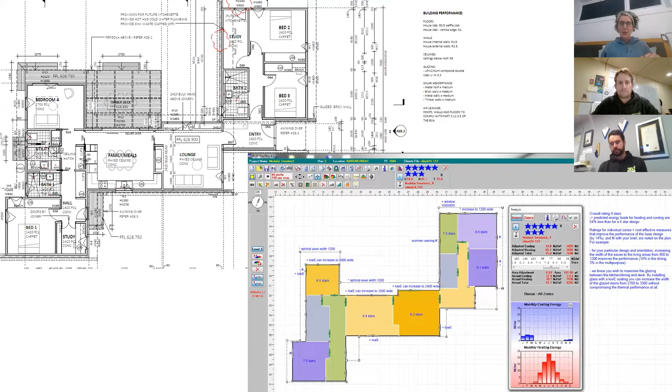And tonight we're talking about a new build, and there'll be fantastic presentations about renovations. I also want to stress that it is a really useful tool for retrofits as well. And I did a webinar for Renew last year about that you can find on their YouTube channel, and some other case studies about renovations.

But Rainbow House, here she is. It's a house that was completed at the end of the year before last. Its rating is just over 8 stars. And the house is only 172 square metres. And I think this is worth pointing out to people. The average new home in Canberra is 253 square metres. So this family home is considerably smaller, but it feels and functions like a fantastic home. And of course, if you're serious about sustainability, making your house smaller is one of the key things you can do. Built by 360. And I do want to point out the beautiful photos you see tonight are taken by Ben Wrigley.

Before we show you the beautiful new house, let me show you what was on the site before. Whenever clients come to us, we do like to investigate the renovation potential of the home. And actually 3/4 of our work is actually renovation work and retrofit work. But in this case, the clients had lived there for 13 years and they were really sure they wanted to rebuild. And after looking at the plans and the house with them, I agreed it was a sensible decision.

The existing house is the classic, north is pretty much straight up. Classic arrangement of kitchen, dining, laundry and bathroom along that lovely northern face. Big living room to the south that opened up to an outdoor area. You can see in the photo here, out here. Did have a little deck at the back, but that's the laundry and the bathroom.

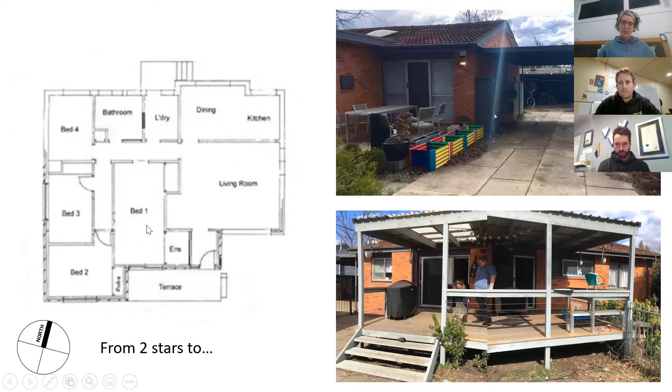They came to us with a fantastic brief, and a talented member of my team, Duncan Hall, came up with this concept - this is the original concept sketch. You can see that the living areas make the most of that lovely northern aspect. We've got two working-from-home spaces, which have come in handy - a study nook here and a craft space here. The bedrooms have been tucked down the western side because the position of the car accommodation was already decided by the existing driveway. And there's this clever little courtyard out front, which hides the clothesline and things, so that none of that stuff is out in the beautiful sunny backyard.

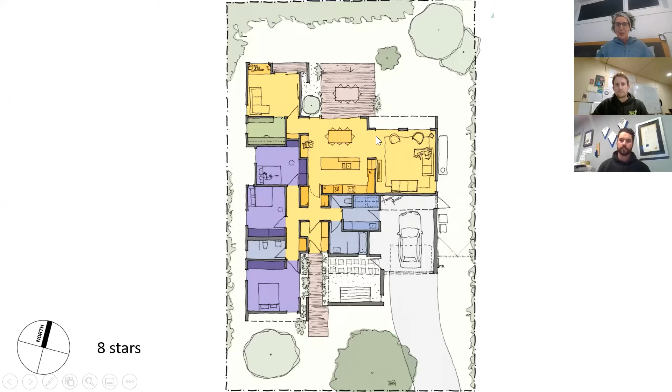As I mentioned earlier, we do the BERS or NatHERS modelling at every stage. At the concept design stage, we'd done some modelling and had it sitting around 7.8 to 7.9, depending on a few things. This is the modelling I did at the second stage, which we call design development. I won't go through it in huge detail, other than to point out that we get the overall house rating here, and you can see the visually represented cooling and heating loads in Canberra. Our houses typically have a much higher heating load than cooling.

The other thing it allowed us to do was look at how each zone is performing. At each stage, we carefully look in particular at glazing levels, so the amount of window area is really important. Just because a wall faces north doesn't mean it can all be glass. So we optimise the glazing-to-floor-area ratios to optimise the performance of all these spaces in both winter and summer. Things like eave offsets and eave projections - how high an eave is above a window, as well as how far it goes out - as well as the insulation levels and construction materials, are all factored into this modelling.

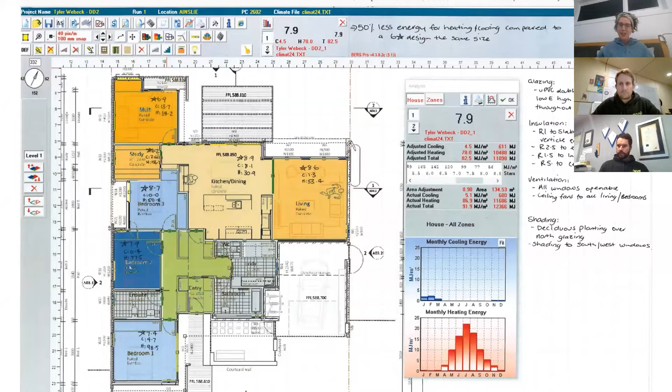So this is the final design we came up with, and I know you're keen to see the house, so I'm going to let Will and Dean show you through in a second.

Not much changed from that original concept - it was just tweaking of all the internal details, lots and lots of storage and things. One cute thing that Will and Dean will show you is that these clients have twin daughters, aged 12, and they have a sort of secret door between their bedrooms. Nothing to do with sustainability, but good fun.

Just reminding you that our clients had lived in the house for 13 years and they had a really clear idea of what they wanted. They were genuinely concerned about the Canberra environment and our changing climate, and they wanted to address that. They were serious about using science and really wanted to minimise their environmental impact, and NatHERS is a great tool for doing just that.

So now I'm going to hand over to the boys - if they are there.

Yep, I'm here. Hello, everybody. My name is Will Duncan from 360 Building Solutions, one of the directors. We'll introduce Dean in a second. But yeah, it's another brilliant design from the Lighthouse team.

One of the first couple of things we'd like to highlight is from the original house - this was the first house that I was allowed by my business partner to do a full salvage on. So the existing house, we demolished most of it by hand and tried to recycle and reuse all of the materials wherever possible. The front brick, the Canberra red bricks that we pulled down off this house, we didn't reuse on this house - they were a little bit too orangey, didn't really fit in with the colour scheme. So these recycled bricks came in from Melbourne, which got that nice dark red colour.

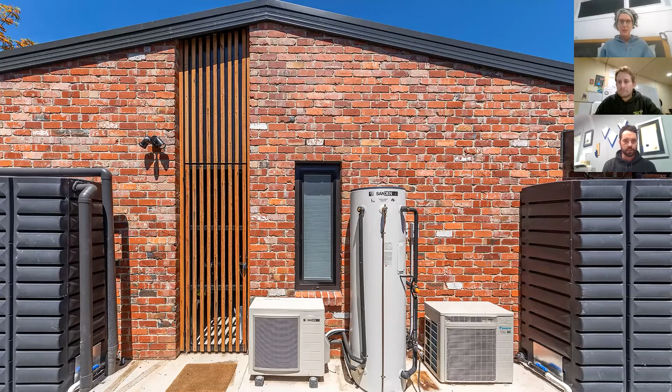Yeah. Hey, I'm Dean. So this is the side where we have all the utilities. As you can see there, we've got the Sanden heat pump. We've also got the Daikin split system, which is the only source of heating and cooling for this house. We've also got the slimline water tanks there, which capture water from all the roof.

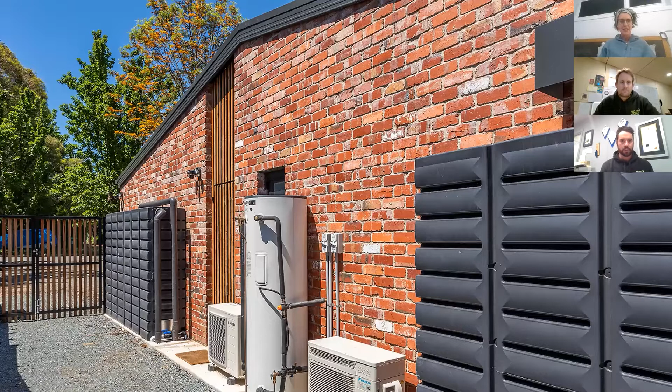We've also got an easement down this side, so we needed access. That's the reason why there's a double gate there, made with all recycled materials. If we go to the next slide, it'll show us some of the slab edge insulation, which we do on all our builds. It's a must in Canberra's climate, tucked away under there, underneath that cladding detail.

Some of the other materials we've used on this house are fibre cement sheeting, also some Custom Orb cladding, both very cost effective and beautiful. Behind that is our external wraps, which we used Pro Clima wrap for this one, taped and air sealed from the outside, so that's vapor permeable.

No internal wraps, only external wraps. We rely on the internal plasterboard for our internal seals. You can also see our UPVC windows, which provide really good bang for buck. You pretty much can't beat them for the price and efficiency. We've also got a custom-made pergola there, which eventually will have a nice deciduous grape vine covering the top of the canopy, providing beautiful protection from that harsh northern summer sun.

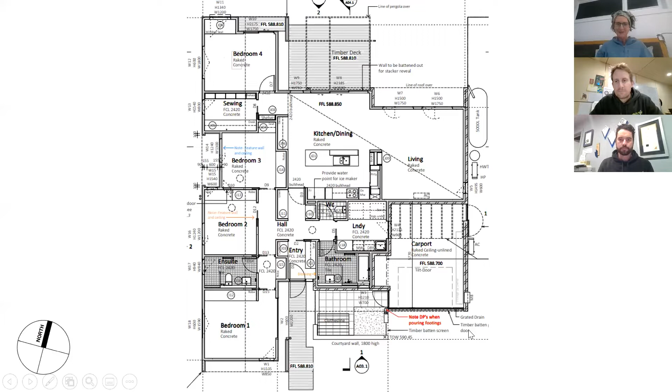That was the start of the colour. One of the biggest things to highlight from this pic is the winter sun. When it comes in, it's lapping just at the bottom of those beautiful hot pink cupboards, and you can imagine that hot pink heat just coming up through the slab from there.

The pink that is specified there, the original hot pink we designed apparently wasn't pink enough and it wasn't hot enough, so that's about as hot pink as you can get, which stands out well against the beautiful plied design, which goes well with the rest of the kitchen.

Burnished concrete floors, just a standard burnish, nice and simple. It works well with the houses, simple, cost effective, and it's got great thermal performance with that natural sun coming in through northern windows.

Living room here, we've got our one split system that heats and cools this whole house with the aid of the ceiling fans, which we can't see in most of these photos. But they are big ass fans and they work really well.

The other benefit of having those fans is you have a fan which circulates the air, but you also have your light fitting on that fan, and that's only one penetration in your ceiling per room. So minimising those penetrations wherever we can in the ceiling, which also reduces the gaps in your insulation.

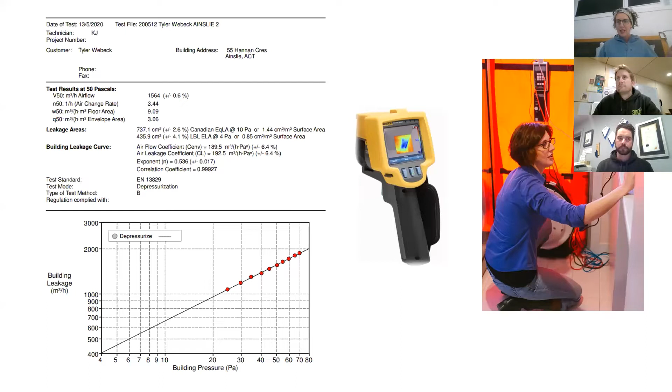I think we should wrap up by saying the clients are really happy. They're amazed by how comfortable and healthy their home is, how little energy they use, and how much of a huge backyard they have to play in now. They're going to be very happy there for a very, very long time. And I think that's us done—we look forward to answering some questions later.

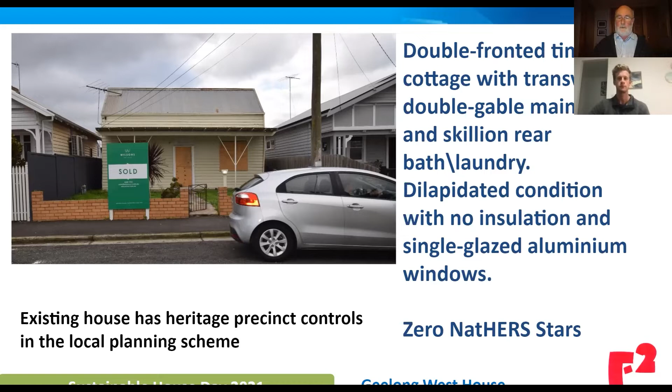My practice uses the first-rate NatHERS program. So I can see from Jenny's slides that they use BERS. There are in fact 4 front-end options that function for NatHERS. There's first rate, which is predominantly used in Victoria, BERS, which was developed in Queensland, Accurate is the front end that CSIRO developed, and a new program called Hero has been developed in Queensland. So all 4 use the same engine to drive it, but the different software developers have put different front ends onto it. That means that there are slightly different reporting outputs that the softwares deliver, but the overall result is benchmarked so that they all provide the same results, and they're used to different effect.

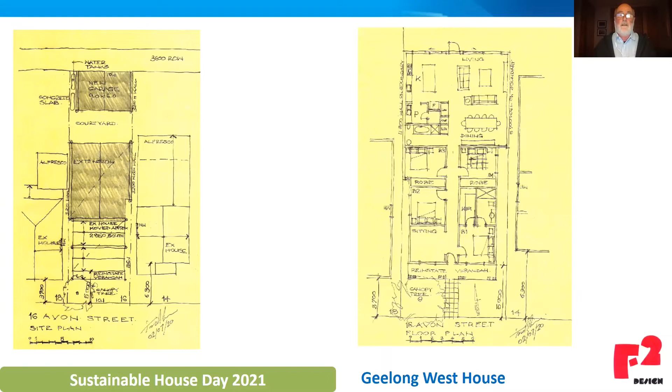Once we have agreement for the design, we convert that to a CAD model and start doing our design development and then on to documentation. You can see here on the plan that we have the big living, dining, kitchen space. Then there are bedrooms and a study in the original part of the building, plus a bathroom for the main bedroom, and then the existing building, which is timber frame structure, and then the extension is a slab on ground where we've got the third and fourth bedroom and the main living kitchen area.

The performance that we get in our climate zone in southern Victoria benefits greatly from passive solar gain in winter, and we want to get as much of that sun into the house as we can and have the correct ratio of thermal mass in the house to store that heat, so that's there for use after the sun goes down in the evening.

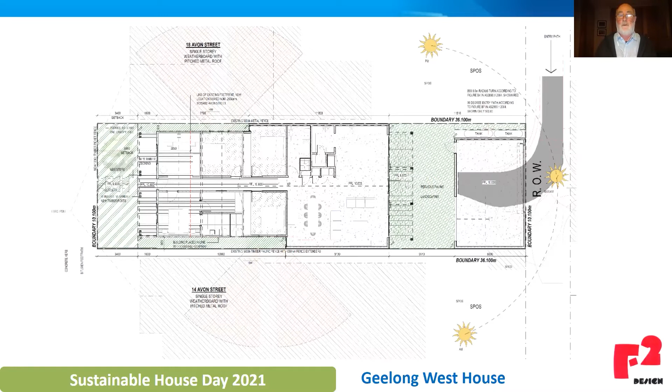You can see those rooms delineated a bit more clearly. The bedrooms have a different thermostat setting in the NatHERS software, which means that you don't need to get as much heat in there during the day, and therefore bedrooms, although they do benefit if you want really high performance from your house, they do benefit from sun coming in, but it's not anywhere near as critical as getting the sun into the daytime occupied spaces.

You can see there that we do have a really large area of glass on the north side of this living space, but protected by a pergola so that the sun comes in during winter but is excluded during summer. The other thing that we consistently do on designs is in fact have as little eave as possible on north facing windows, but have it adjustable. A lot of people who use rule of thumb responses say that you've got to have eaves to shade windows. Well, in our climate zone, that is not in fact correct for north facing windows. The best thermal performance is achieved where you've got fully adjustable shading over north facing windows.

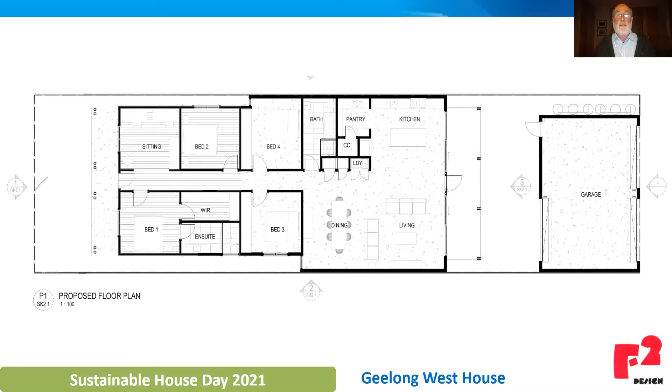So these are then the images that give you the understanding of the form of the building, a renovated facade facing the street, the repair of the double gabled section of the existing building, and then a very, very simple, almost industrial form of building housing the main living area and 2 extra bedrooms. So it'll be a reasonably cost-effective project to build.

And Brady can talk to that, because Brady, in fact, as the owner, is also the builder. We have been engaged numerous times, in fact, by builders to design their own homes because they've seen our approach to design solutions and obviously made a judgment that they can benefit from our ability when the builder builds his own home.

I can see Brady is in the room at the moment. Yep. But Hi, Tim. Hey, Brady.

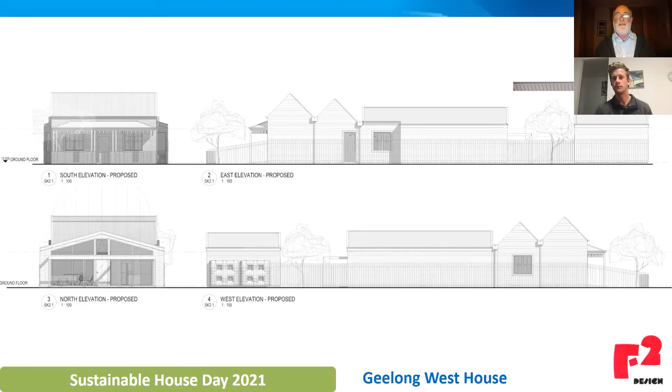Okay, thanks, Brady. And next slide, please. So you can see there how the sun will be coming in through those large north side windows, and next slide because we will run out of time pretty soon.

So what we've achieved in this project, even with that simple little timber cottage, but upgrading it all, this house will rate 8.2 stars on the NatHERS scale, and that's the NatHERS certificate there.

The output that we get from FirstRate, the instructive part that I go to always first is the zone energy load table, and that tells us what the heating and cooling loads are for each room in the house. And highlighted there is the result that we've achieved for that main daytime occupied space, which is what we always concentrate on.

And you can see that that room, in fact, is operating at 8.85 stars, where it's only using 32.3 megajoules per square metre for the total annual heating and cooling. And interestingly, the 16.1 megajoules per square metre for heating and 16.2 for cooling are almost identical.

So to round off, NatHERS has been an extraordinarily powerful tool for us to make design decisions and deliver houses that are comfortable to live in, use the least amount of energy, which is not only good for the occupier's household budget, but it also helps the environment as well.

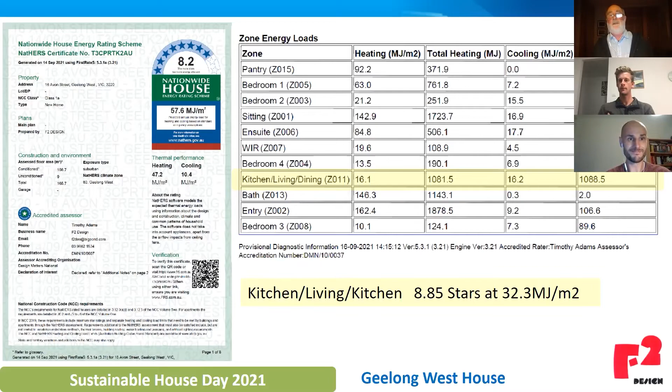Thank you so much, Tim, and thank you so much, Brady. I am really looking forward to a future Sustainable House Day where we get to see that in real life. So thank you so much for that great information.

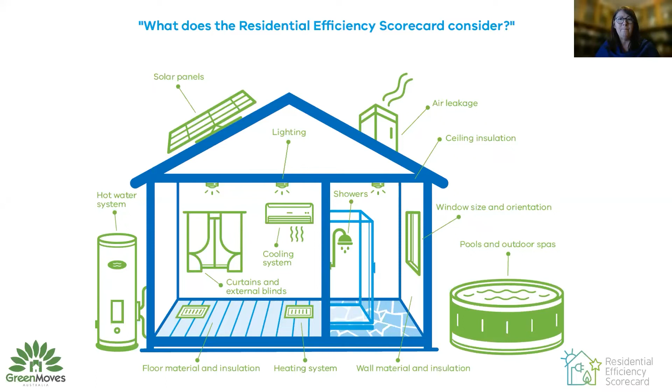So let's talk a bit more about the scorecard. It's used by qualified and accredited assessors. Data is entered into the tool during the on-site assessment, and the certificate provides information which does assist householders, with the help of the assessor, to identify which upgrades are beneficial for their specific home and circumstances.

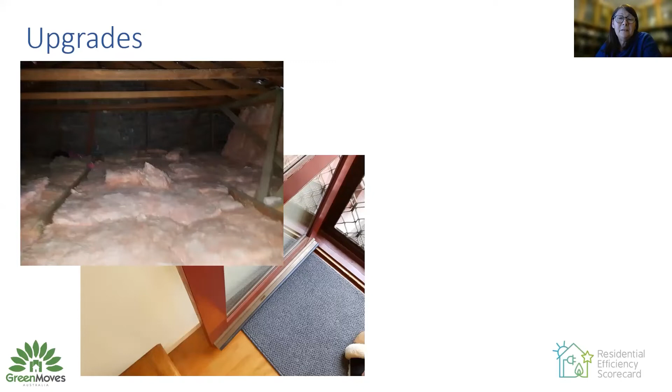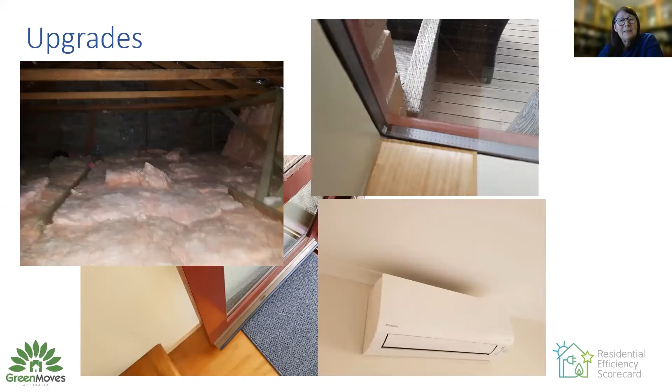Some of the more expensive upgrades put in place over the year were replacing the failed gas ducted heating system with a highly efficient reverse cycle unit. She did retrofit some double glazing to existing windows. And then the cherry on top, the last thing she did just recently, was installing a 3 kilowatt solar system on the roof.

Now, I've got a short video clip of Alice from when we had a chat with her earlier. I just wanted to go to that now.

I've got a horrible feeling that I forgot to tick that button. Is there a quick way I can do that, tech support? Just move your mouse cursor into the center of the screen where the video is and try giving that a click. And yeah, there we go.

So Alice, thank you so much for joining us, really appreciate your time. I'd like to ask you a few questions about the scorecard assessment you had on your home not long ago. How did you find the scorecard assessment process? Look, the assessment process was seamless, really.

At the site visit, which took approximately 2.5 hours from memory, the auditor or assessor explained the process and the scorecard too. Once the on-site assessment was completed, she sat down and explained our property star rating and the priorities for improvement for our home.

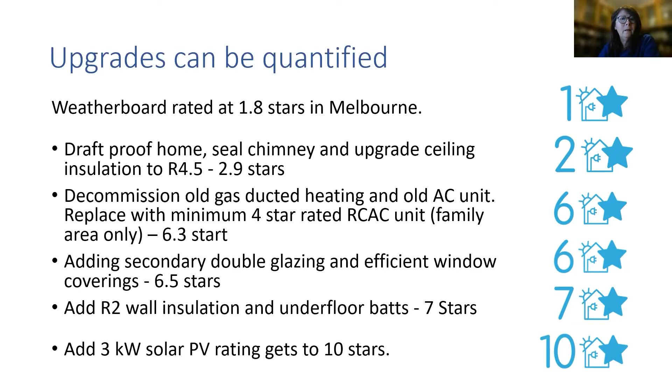Now, we're asked to talk also about the most common upgrades. The most commonly recommended upgrades that are relatively easy to do and cost effective are, of course, draft proofing. I don't think I've come across a house yet that doesn't need some draft proofing. The shower head change to a 3-star WELS rated or higher, because that impacts the energy use. If you've got a high rating shower flow, it will impact the energy use of the hot water service and use more hot water and more energy to do that. Insulation upgrades - we find a lot of homes that don't have insulation in the ceiling that's particularly good, or it's either at a low level or it's very patchy where it's been moved. And window treatment. Not everyone can afford to replace windows, but by improving the window coverings with the right type of window coverings, it can significantly help the home.

Upgrades that require more capital investment upfront, but can result in significant star rating increases and reduced cost to run the home, include replacing old heating and cooling systems, particularly ducted systems, with individual or multi-head reverse cycle units of 4-star energy ratings or higher - that's always very effective. Hot water service upgrades, especially where the old system might be one of the old electric resistive types. Secondary and double glazing is recommended where the circumstances are appropriate, or if the homeowner is planning on window replacements or major upgrades in the future. And finally, installing solar PV is often recommended, but only if the home's roof is suitable for it. We do very much push the energy efficiency upgrades first because that's very important, and comfort - a bit of draft proofing can have a significant effect on comfort immediately.

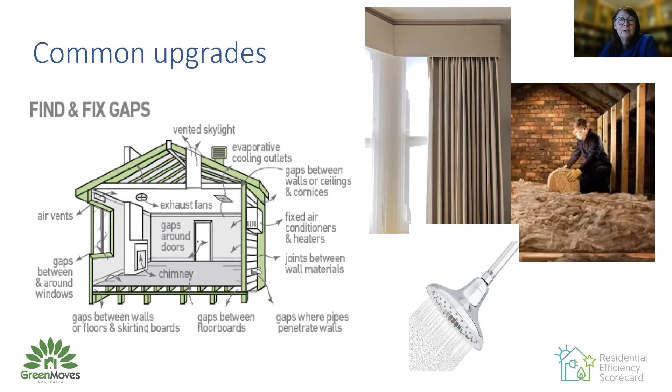Now, the other thing that we found with the Scorecard is that some finance companies, and this applies to the other NatHERS tools as well, are now offering lower cost upgrade finance and mortgages for more efficient and higher rated homes. Scorecard ratings can be used to qualify for some of these offerings, as can some of the other NatHERS tools. And in relation to government programs, your local assessor should be able to assist with programs in your local area.

So in summary, the Scorecard is available nationally now, primarily for existing homes. It can actually be used for new homes and renovations, for example, under the deemed to satisfy requirements if necessary, but again, not for compliance. The star rating is based on cost to run the home. It does define appropriate upgrades for the home, dependent on what the assessor finds when they go through and enter into the tool. One of the great things I find is that simulations can quantify the impact of the upgrades, and it's now available nationally as part of the NatHERS suite of products, which is terrific.